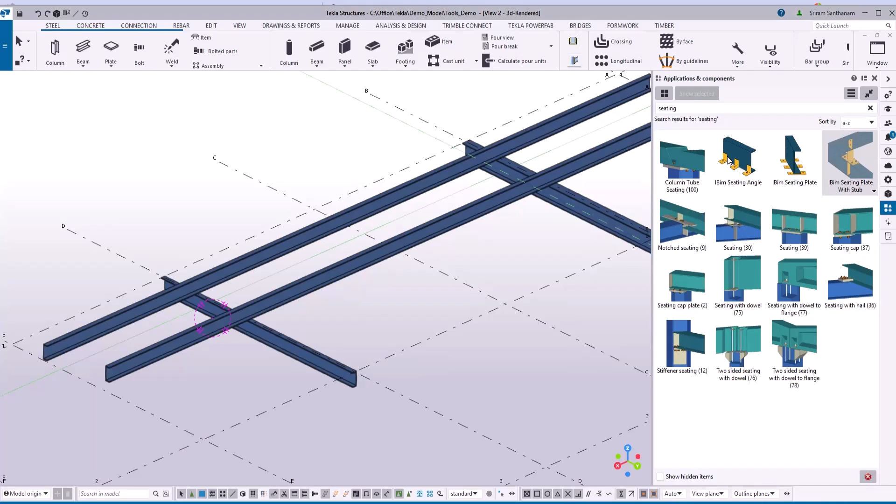Hi everyone, in this video I'm going to give you a demo of this application: IBIM seating plate with stub. This is one of the common connections we use in residential projects. Let me walk you through how this application works.

I'm going to apply this component to UB and UC sections. Select the component and pick the primary member and then the secondary member. You can see it will automatically create the connection here.

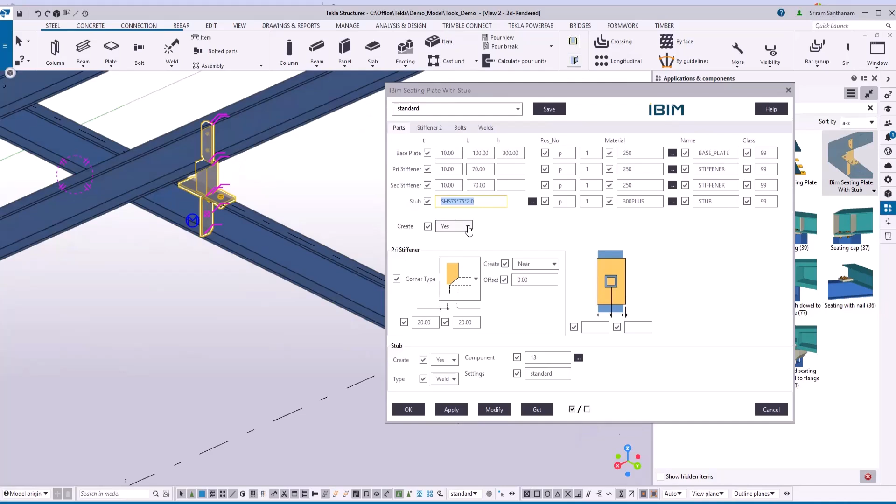This is where you can change the base plate, primary stiffener and secondary stiffener properties, and this is the stub profile. If you don't want to create the base plate, you can select the no option here and modify, so that this will be directly welded to the primary member. Let me change this option to yes and modify.

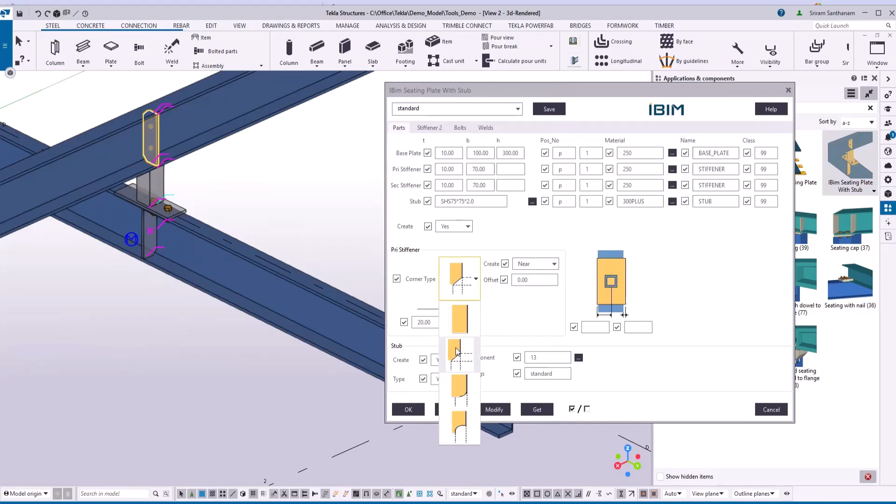This is for creating the stiffener. You can create the stiffener near side, far side, or both sides. If you're adding this component to a UB section, you can choose either near or far or both. Now you can choose the different options and set the chamfer values.

If you want to offset this stub, you can enter the distance here. For example, just to show you, I'll make it 100, and let me go to the bolt and fix this one. So I'm going to the bolt.

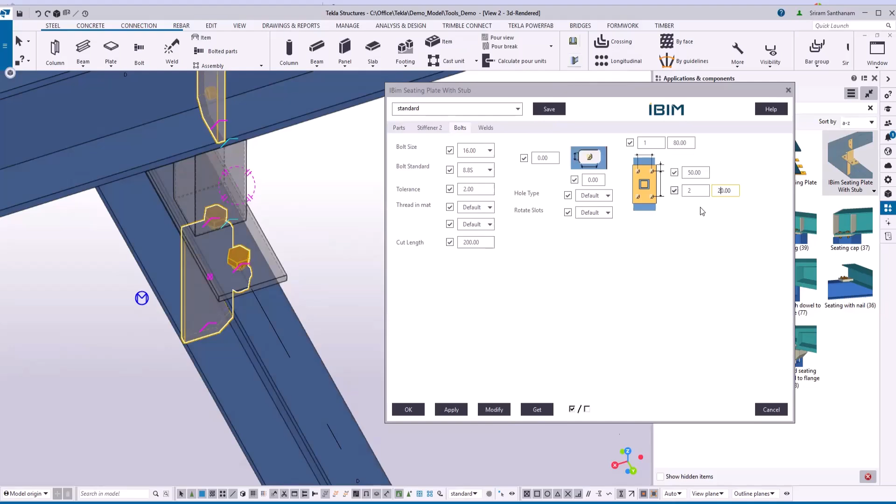The distance is 200, and modify this. Let me go back to stiffener 2.

This is for the secondary member, and you can change the option again to near, far, or both, and you can offset it from the middle. For example, let me type 100 and modify.

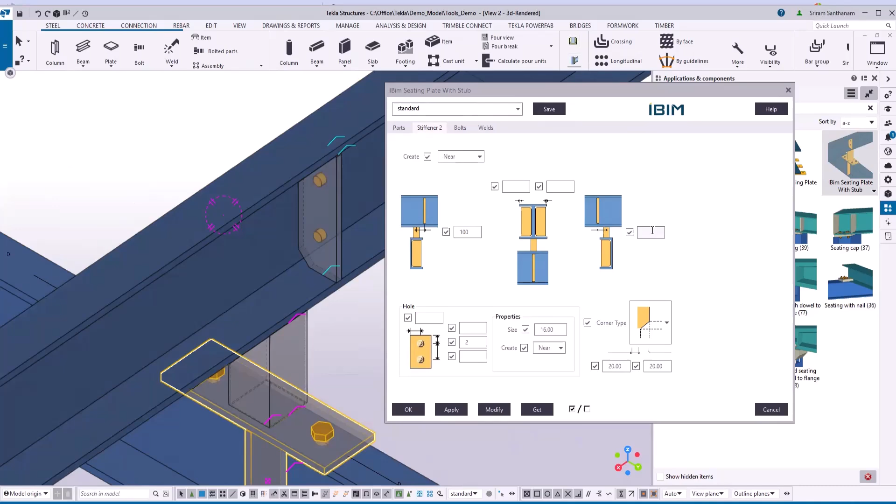And this one is for moving the near side and the other one for moving the far side. You can also add holes, so change the size and create either near, far, or both. Then you can enter the distance for the hole and number of holes, and then you can set the distance from the plate top to the first bolt, and this is for the edge distance.

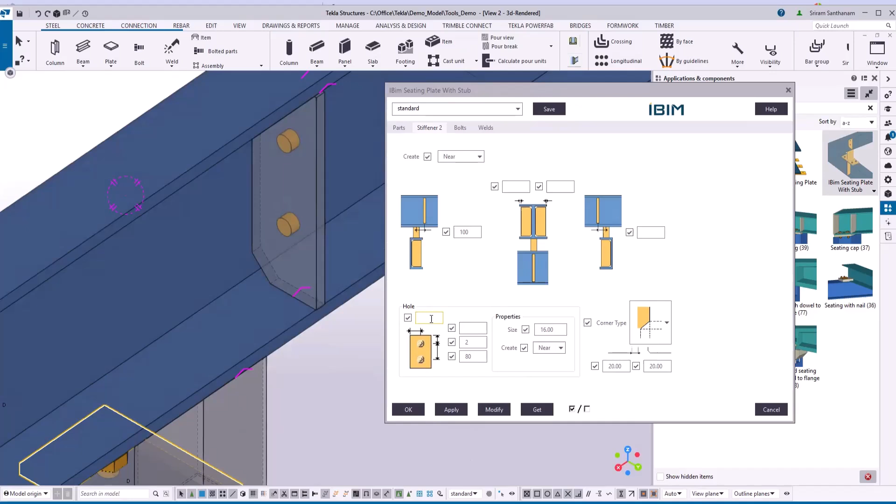So let me type 50 here and select and modify this. Let me make it 30. And if you want to add chamfers, you can add chamfers by entering the distance here.

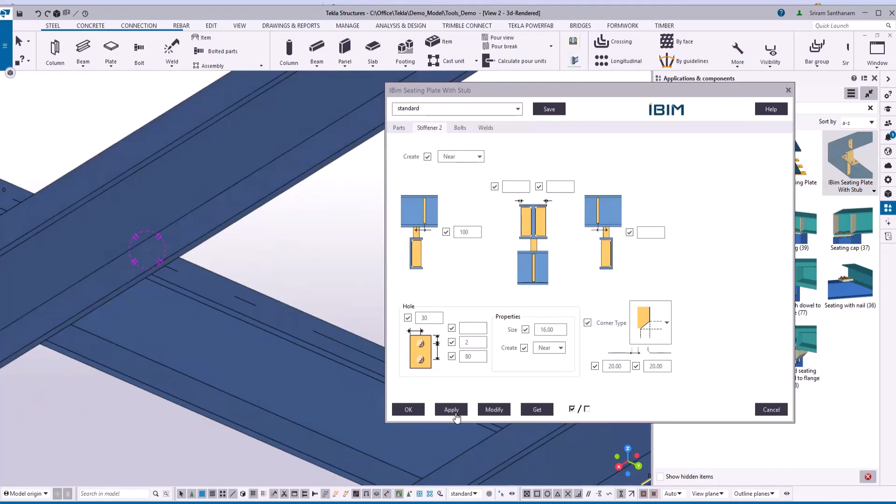So the other scenario, where you don't want to add the stub and just want to connect these two members - in that case, what I'll do is select the primary and secondary, and then once you open the component properties, I'll go and change this option to no and modify it, so that it will remove the stub and keep only the...

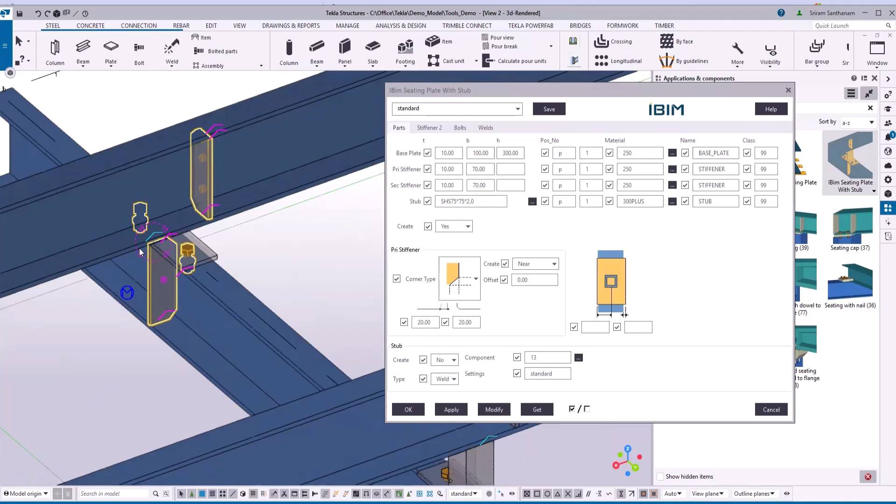...seating plate. Let me apply this connection to UB sections. Select the primary and secondary, and then double click and open the component. Change this option to yes and modify.

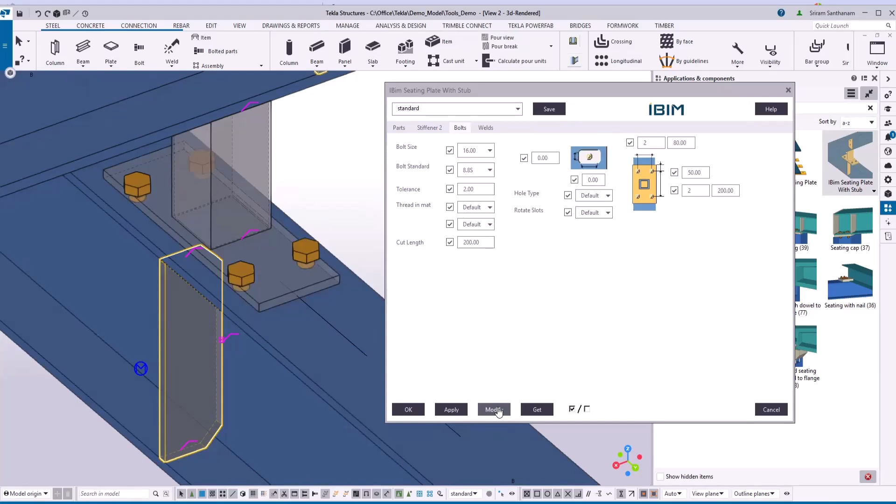So I need 2 bolts here. Let me go to the bolt section, type 2, and modify this. Now I'm going to change the plate width.

So here it is, as you can see, this application has got all the options that you need. If you have any questions, feel free to get in touch with me, and thank you for watching this video.